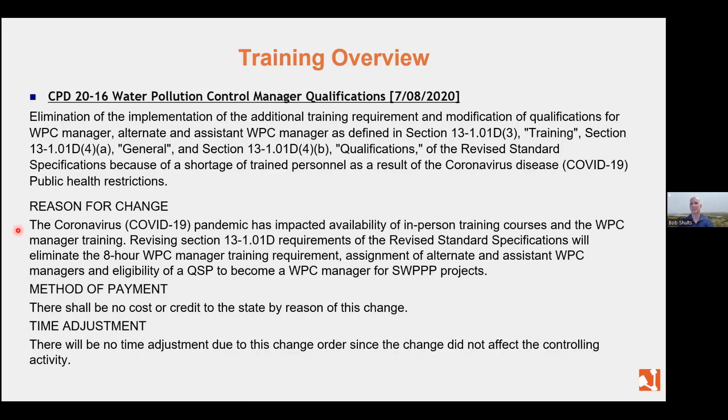Due to the difficulty getting widespread training to potential water pollution control managers, Caltrans issued guidance for contractors and REs for a zero-cost change order to remove the requirement for 8-hour training on a project-by-project basis. This came out during COVID. The directive stated that because of the coronavirus pandemic and availability of in-person training for the water pollution control manager, the revised Section 13 for the 8-hour training can be deferred on a project-by-project basis for a no-cost change order and time adjustment. That came out back in July 2020.

In most cases, at this point, Caltrans REs are not allowing this change order due to the current availability of training classes. You saw the statistics, you saw how many people are trained at this point. This is still out there as far as I know with Caltrans. So on a project-by-project basis, if the availability of training isn't there, you're on a remote project in a remote place, you haven't had a chance to be trained yet, you can still request that no-cost change order to revert back to the old spec.

But my understanding currently is that people are required to have 8-hour training at this point because the availability of training is out there now due to COVID improving. So most likely you're not going to be able to use the no-cost change order anymore, and you will have to have the water pollution control manager training. So if you don't have it and you need it, get signed up.

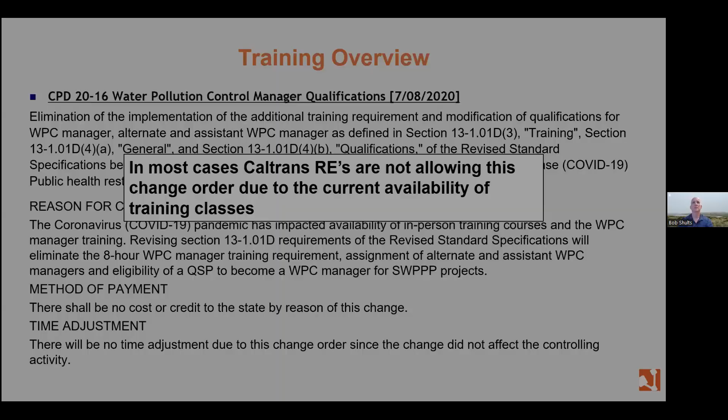Bob, this might be a good time to put this question in here.

Someone asked, are there previous requirements or certificates for this training, and shouldn't they get confused between this and what we used to have, the 24-hour training? Yes. So no -- I'm going to talk about all the things. As we move forward, the next few slides will talk about the pieces to the puzzle, the things you need to be a water pollution control manager above and beyond the 8-hour training, and the difference between an assistant water pollution control manager and an actual water pollution control manager. I'm going to go through those quickly.

So there are some other certificates that are required. Prior to the Construction General Permit in 2009, Caltrans used to have a 24-hour training required to be a water pollution control manager. When the CGP came out in 2009, Caltrans got rid of the 24-hour training and said, if you got to be a QSD, that's enough -- that's a 3-day training as it is, that's all you've got to have. And you have to be a QSD to be a water pollution control manager. They determined over the years since then that we're missing some of the understanding of the language of Caltrans.

That's the reason why they decided they wanted this 8-hour training, so that people really understand the language. I'm going to go through a narrative of what you need to be a water pollution control manager. In the overview of the training, you're going to learn about being a water pollution control manager and other CGP compliance strategies covered during the 8-hour training. A water pollution control manager must be an integral member of the project management team.

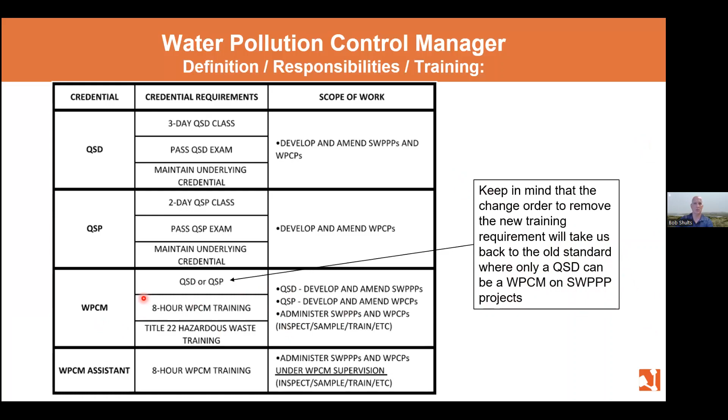Here's the language from it, which states you must assign a water pollution control manager. This is the direct language that people are being held to when they submit their SWPPPs and water pollution control programs. You must assign a water pollution control manager to implement the SWPPP or water pollution control program. You must assign an alternate water pollution control manager to perform all responsibilities of the water pollution control manager in his or her absence. The alternate must have the same qualifications. You may assign an assistant water pollution control manager to act under the supervision of the manager to inspect, repair, and maintain water pollution control practices, collect water quality samples, and record water quality data. You may have more than one assistant water pollution control manager.

So I'm going to talk about this language directly because we're being held to this. Obviously, when you submit your SWPPP or water pollution control program, you have to assign a water pollution control manager, period. You definitely have to have that person, no matter what. Got to have a person that meets the requirements as your water pollution control manager. It also says you have to assign an alternate water pollution control manager to perform the responsibilities when the water pollution control manager is gone.

So we are getting SWPPPs and water pollution control programs rejected or returned saying, hey, you've named a water pollution control manager, but you didn't name an alternate. You have to name both, or we're getting them kicked back. So you've got to name two people, a primary and an alternate water pollution control manager, and they both have to be eligible to be a water pollution control manager.

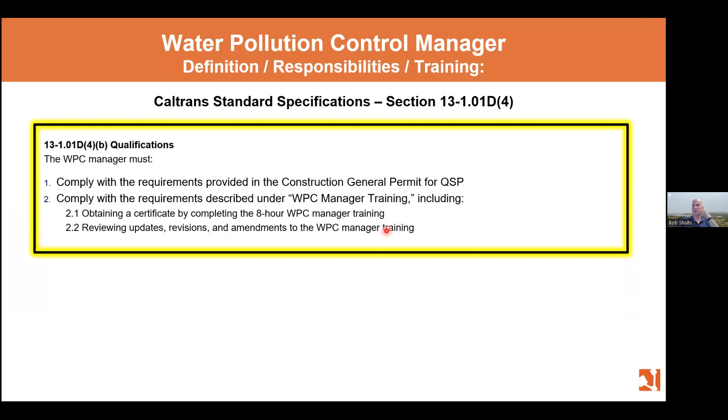This is just the language from the spec that states that you have to obtain a certificate of completion of an 8-hour water pollution control manager training. This is the actual language that I've talked about in great detail now regarding an assistant water pollution control manager. They have to be trained, and they have to have taken the 8-hour water pollution control manager training course in order to be an assistant water pollution control manager, in order to be able to be a designee who does inspections, repairs, maintains water pollution control practices, collects water quality samples, and reports water quality data. You have to have the 8-hour water pollution control manager training.

A water pollution control manager, so it's a Caltrans designation. Here's the definition: you have to be the primary contact responsible for water pollution control work. You have to oversee the water pollution control work. You have to maintain water pollution control practices, the maintenance of it, the inspections, the inspection reports, the REAPs, the sampling analysis, the preparation and submittal of NAL exceedance reports, violation reports.

The SWPPP annual certification is now gone. This is where at the end of this, we're going to get into the winterization plan amendment. The SWPPP annual certification was kind of a garbage-in, garbage-out thing where once a year in July you said, yes, I did everything right. So it was a one-pager and it was kind of unnecessary. So we got rid of it, but we replaced it with a mandatory winterization plan amendment that's due on September 15th, which I'm going to go into detail on.

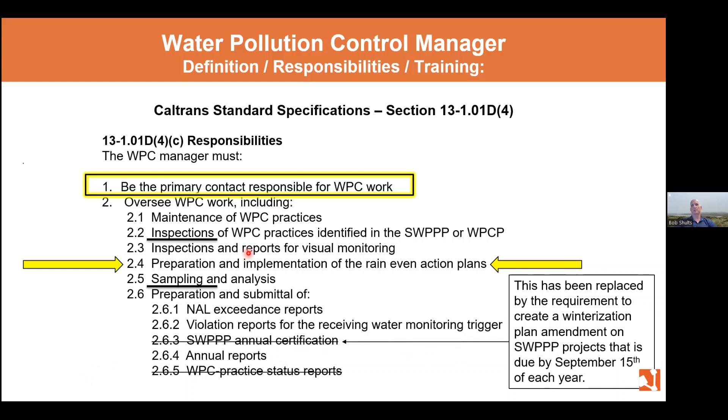Annual reports, water pollution control practice status report. You have to oversee and enforce hazardous waste management practices. You have to have the authority to mobilize crews to stop construction activities if they're causing water pollution control issues. Ensure that all employees have current training, implement the authorized SWPPP, revise the water pollution control program, be at the job site within 2 hours of being contacted.

And this is something that is definitely being adhered to, because people can't just farm out their water pollution control manager certificate without seeing the job. The intent is for the water pollution control manager to have intimate knowledge and be involved in the job site day-to-day operations from a stormwater standpoint.

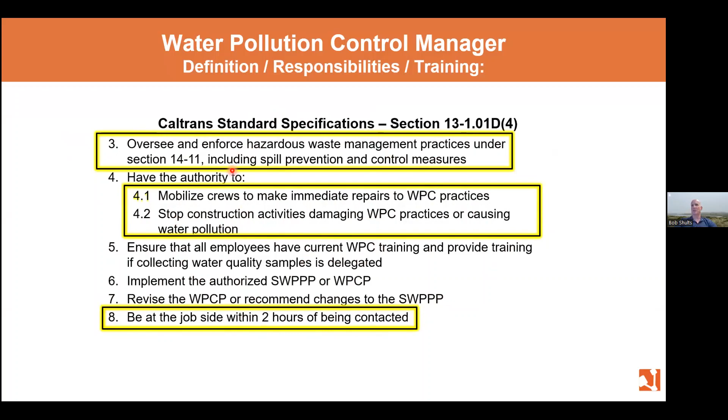Water quality monitors are also required, and we have 401 sampling on Caltrans projects. A water quality monitor has to be listed, and they're expected to have the same qualifications as the water pollution control manager, and they could be one and the same person. So my interpretation is, if they want to designate someone and delegate the work to do the sampling for water quality objectives like 401 sampling, they need to be an assistant water pollution control manager and have had the 8-hour training.

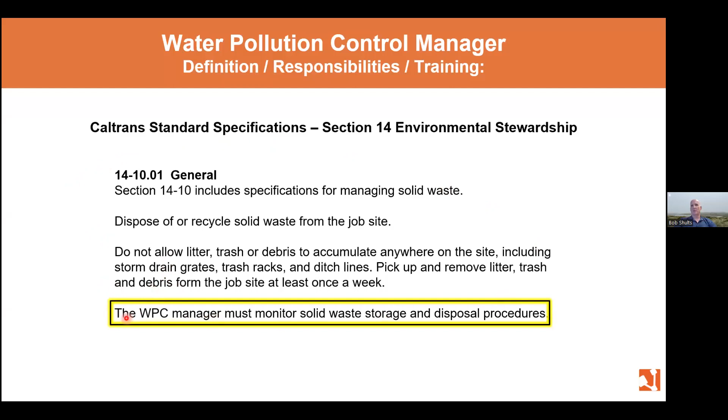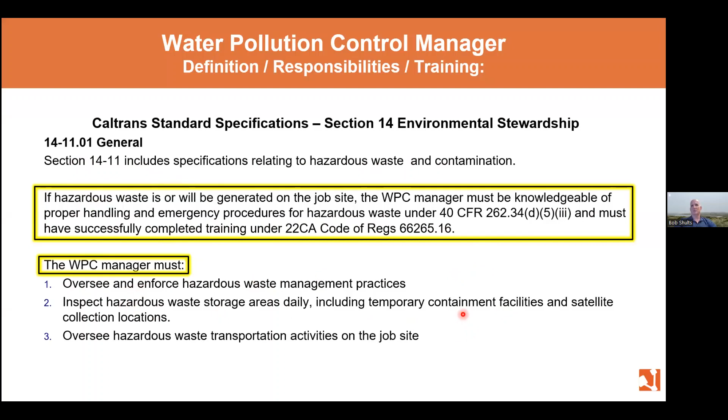Something to note that is necessary: the 8-hour training is necessary in other ways other than stormwater. You must be versed in section 14 environmental stewardship. You must have knowledge of solid waste storage and disposal procedures. You also must have hazardous waste understanding and be trained. This is where it states that you must have successfully completed training under Title 22 so that you can oversee and enforce hazardous waste management, inspect hazardous waste storage, and oversee hazardous waste transportation activities on the job site.

So that's where this Title 22 training comes in. On Caltrans projects, to be a water pollution control manager, you need the Title 22 training, because if there is, was, or will be generated, or ever any historical contamination on a Caltrans job, you can't be the water pollution control manager without having had Title 22 training. Send me an example of a Caltrans job that doesn't have some sort of hazardous waste, and good for you — it just basically doesn't come up. So you've got to have this training.

This is kind of the one that most everybody gets, hazmatschool.com. Last time I checked, it's $125, a 4-hour online course. You need to have this certificate, or you'll be rejected as a water pollution control manager, or some other certificate that proves you had Title 22 hazardous waste generator training. If you're HAZWOPER certified, 40-hour HAZWOPER, you're overqualified — the HAZWOPER certificate takes the place of this. You don't have to have this as well.

Okay, so that's a quick and dirty flying through what happens on the water pollution control manager 8-hour training. Again, a water pollution control manager needs to be able to do these things by definition: be the primary contact, maintain all the water pollution control practices, manage all the inspection reports, understand hazardous waste management practices, have the authority to mobilize crews, implement and authorize the SWPPP water pollution control program, and be at the job site within 2 hours of being contacted.

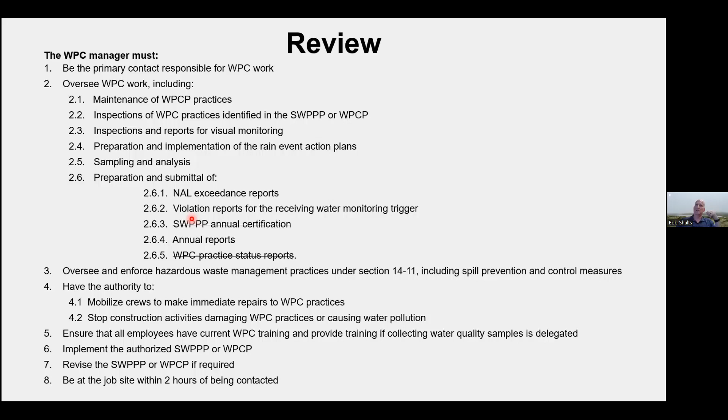So the 8-hour training, we're going to go over all this. You're going to do a training overview, and you're going to talk about the definition of responsibilities, a lot of what I've already just talked about.

We're going to go over the BMPs, inspections, the documentation. We're going to do case studies on filling out the CEM forms.

A tremendous amount of what they're trying to get out of this from an 8-hour water pollution control manager training is for people to understand the language of Caltrans, understand the paperwork, understand how to fill it out properly, when to fill it out, the timing of fill it out. It's all really important, and it's a big beef that Caltrans stormwater coordinators have had. People don't understand their language and how to fill out their paperwork properly, and they spend a tremendous amount of time kicking paperwork back. So we're going to go over that in great detail.

We're going to talk about the resources that Caltrans has for SWPPP and water pollution control programs and the preparation of them. We're going to talk about sampling and analysis plans, and we're going to have a sampling tutorial. We're going to do hands-on sampling training in my class. We're going to talk about reporting and miscellaneous.

We're going to go into detail on when to fill out a notice of discharge form. Notice of discharge forms are something that Caltrans stormwater coordinators feel like are underutilized and need to be utilized more consistently. So there's a whole section in my training on that, and then review and questions.

So that is what you're going to get when you come to my 8-hour water pollution control or any of the consultants' 8-hour water pollution control manager training course, so you understand that.

Okay. Now, the last part of this class, we are going to go over the Winterization Plan Amendment. As I mentioned, when the training requirement came out, the 8-hour water pollution control manager training specification change came out officially in April of 2020, announced in January of 2020.

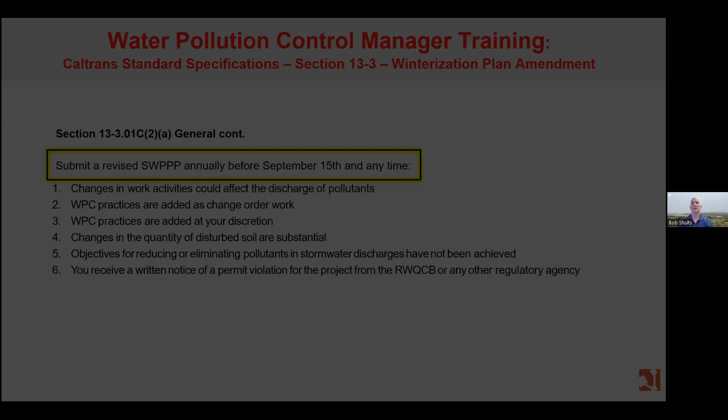Locations of sampling points change, you need to do an amendment. But you also need to do one by September 15th. Revise the SWPPP through amendment. The annual SWPPP amendment must include an annual winterization plan. The annual winterization plan must describe the preparation for the upcoming rainy season.

This should be part of standard operating procedure regardless, but now it's required, and here are the rules by which you have to do this.

By September 15th, you are required to submit a winterization plan amendment to Caltrans, and you must meet the six requirements listed here, or you may get comments depending on how you respond. These are: updated schedule, materials and labor, management of stormwater through the job site, management of areas within the job site, changes to monitoring locations, and slope stabilization.

I just saw something come up in the chat from Janet Rodriguez - good question. Is the winterization plan just for locations that get snow?

No, absolutely not. A winterization plan amendment by September 15th is due for any SWPPP job that is active after September 15th. Now, you may be able to work with your RE - if the job's supposed to be terminated by October 1st and you're really all buttoned up, you can talk to your RE.

But by contract, you're required to submit a winterization plan amendment for any job that's going to go beyond September 15th. It may be mostly blank, or you may have items 1 through 6 answered that the job's going to be done. But technically speaking, you're required to submit one. So whether it snows or not, you are supposed to do a winterization plan amendment by September 15th on any SWPPP job for Caltrans, period. You're required to do it.

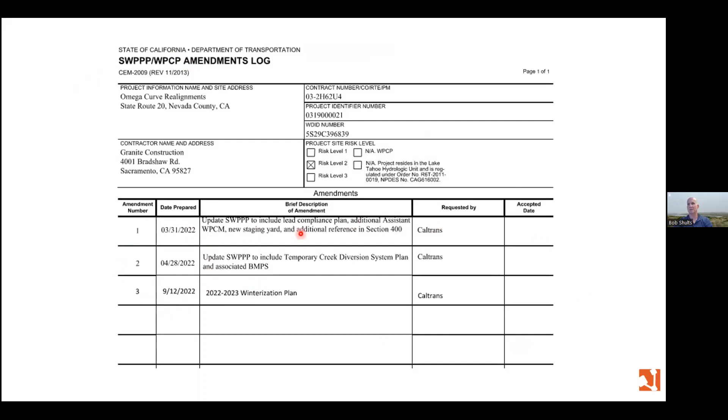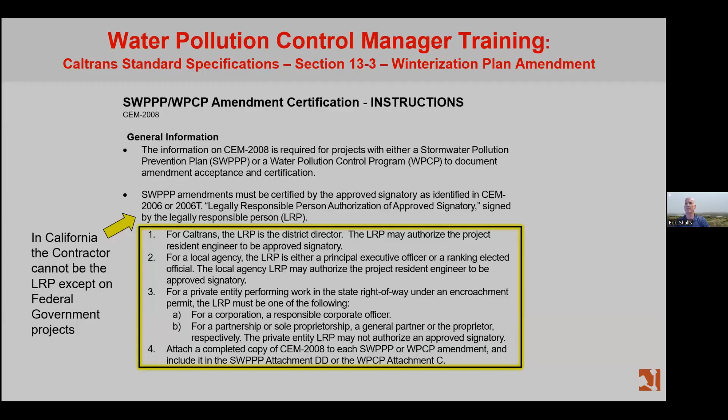So then you have the amendment log, which explains in sequential order. This is our 3rd amendment on this job. We have 1, 2, and 3, and the dates and everything else, and when it'll be accepted. Then we basically have created a template for our winterization plans that mimics the list from Caltrans. There are 6 items that are required, 1 through 6, and that is what we do on our cover sheet for a winterization plan amendment. We have 1 through 6, and we have an explanation and narrative.

And then there's a bunch of stuff that goes in the back end of this to add to it, but we're trying to make it simple for review. So this is our 2022-23 winterization plan. Updated schedule, see attached, and you'll see materials and labor related to water quality, water pollution control.

The subcontractor, so we list the subcontractor as a crew installing permanent and temporary erosion sediment control. Contractor will have a crew of 3 laborers to install BMPs as needed over the course of the winter. BMPs for temporary erosion include item 21, item 23, item 24, 25, and we list some quantities in there. So it does talk about labor, but not total labor, but it does explain.

And essentially the idea behind this, you saw from Deanna's comment, is we're trying to put materials and labor together so that it's clear to the reviewer that it's going to take 3 weeks to get this winterization plan implemented.

So we need to make sure that's starting now, or it's a small job and it's only going to take 2 days to get it implemented. So we've got time, we can look at a 10-day window and decide when we're going to start. That's the narrative process here that they're looking for in their comments, if you get comments on that item.

Number 3, management of stormwater through the job site. If your plan to adjust flow or drainage during the winter months from what is shown on the plans for run-on, runoff, conveyance — no plan to adjust run-on, runoff, and downslope conveyance at this time. So that was our response.

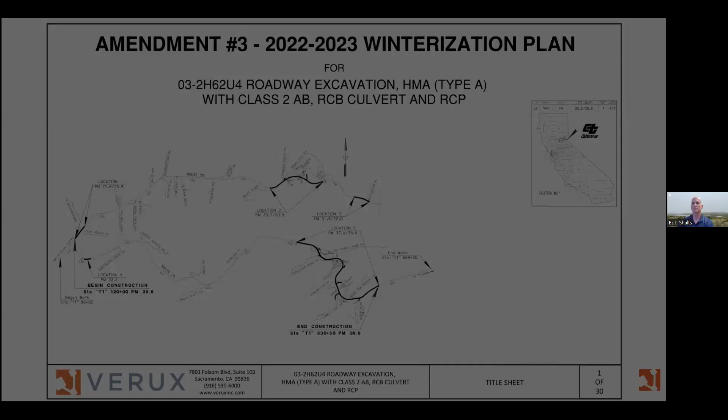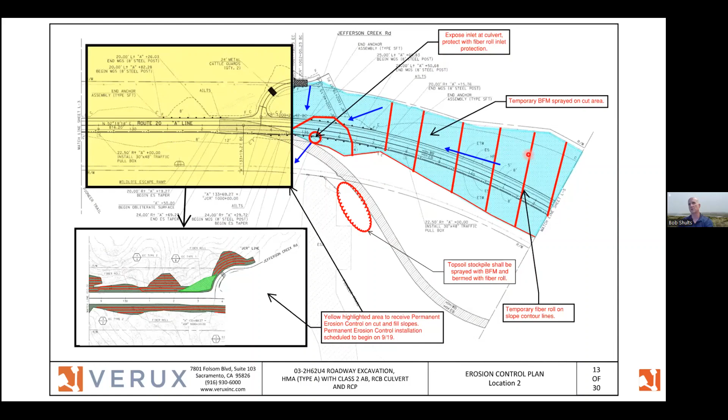The key thing is that you have a set of rules here. It's got to be turned in before September 15th. That gives you time to iterate. Typically it's not going to rain on September 15th, although this year it's a little different. You've got your 6 items, so you need to respond to these 6 items, or you're definitely going to get comments back from the stormwater coordinators and REs.

And then you go through it. Again, this is meant to be a collaborative exercise with the contractor, with the RE, with the project team, to come up with a plan.

And the purpose is that we don't go to jail, right? We don't end up with fines. We don't have problems on the job site because we've given ourselves an opportunity to close the job for winter or stabilize and protect the job for winter, and then focus on the areas where we have to work in the winter and focus on how we're going to protect those areas in a short duration time when a rain event's coming, and how we're going to open them back up after rains, between rain events over the winter.

So there you go, that is the Winterization Plan and Water Pollution Control Manager Training Seminar.

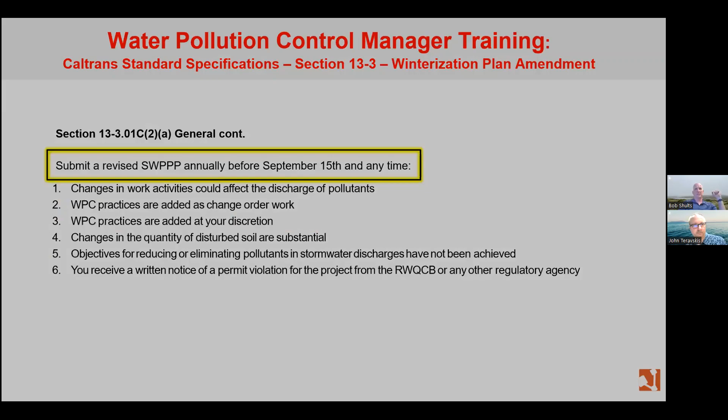The requirement is to meet that language, which says you have to assign a water pollution control manager to implement the water pollution control program, or SWPPP, and assign an alternate. That means you have a minimum of 1.

But if you could list 10, I don't see a negative for listing as many as you've got. If you've got 4 people at your company that meet the requirement to be a water pollution control manager, list 1 as the primary and the other 3 as alternates.

I've received a comment once saying, I've got a whole bunch of people listed as assistant water pollution control managers—I've listed 10 people before—and I got a comment asking why all these people are listed. Because I can. There's nothing saying you can't list a whole bunch of people on there. It just makes it so their info is there.

I understand it can be unnecessary, so we've kind of gotten away from listing everyone who can be an assistant water pollution control manager, just so it doesn't eat up as much paper. But there is no limit to that.

The beauty of it is, if you have 4 at your company, 1 listed as primary and the other 3 listed as alternates, you probably aren't going to know ahead of time which of those other 3 is going to cover for you, John, if you're the primary. It depends on the day and who's on vacation and all that stuff.

By the letter of the law, if it's only John and one other person listed as alternate, and that alternate can't do it that week, then technically you have to do an amendment to get another person listed as an alternate. So if you're already listed, you just fire an email off to the RE saying, hey, I'm on vacation and Mary is going to cover for me, and she's listed in the SWPPP, so you're good.

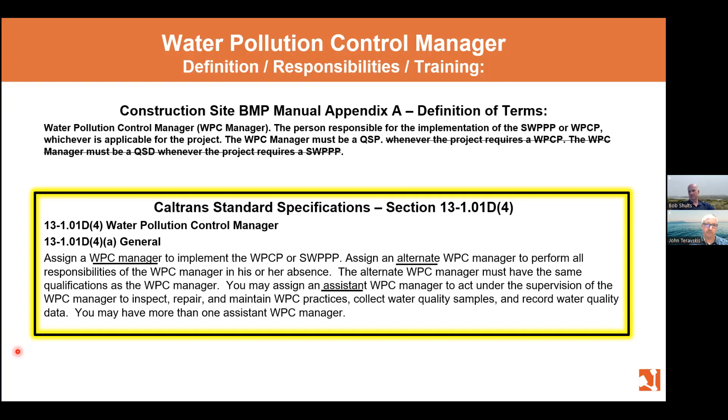Right, let's talk a little bit about level of detail. You and I were having some dialogue before we came on to this workshop. This is the 3rd year these winterization plans have been out, and we've both been noticing—firing off emails to Deanna or Dave Corpus or Michael Sweeney to get clarification on the list shown here. I developed a template just like you did, almost identical. It's funny how close they were, because I just copied this and matter-of-factly answered all these questions. Yes, and I was shocked to have almost every winterization plan returned.

Right, detail—there's a lot of detail. Like the clip of an email from Deanna showing exactly where this came from. Is this just someone's interpretation? Yes, and that's where we're at.

That's what I want people understanding—that's where we're at, this is all we have. And this is an interpretation of what that says, because it says materials and labor. So initially, personally at Verux, we were vague when it came to this, because it doesn't say materials and labor and add all this detail—it just says materials and labor, so that can be interpreted many ways. Early on, we were very general, saying we're going to have for maintenance of BMPs a crew of 2 laborers. But this is an interpretation from one of the stormwater coordinator teams, a great team from District 3, who I think made a reasonable interpretation. I don't disagree with it, I think it's reasonable, and it's helpful. But a different stormwater coordinator team could interpret this differently.

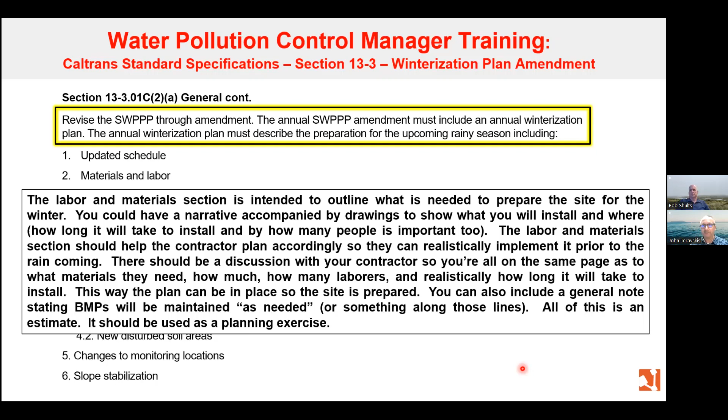I'm looking at the list of participants. We have people who wrote winterization plans in 2022. Anybody want to unmute and share? We've got just a couple minutes left before we end this workshop. Anybody want to tell us lessons learned from 2022? I know you're out there, I see you in the list. I'm not going to call out any names, but if you'd like to talk to us about your experiences this year, that'd be great.

Unless someone unmutes real quick, here's a question that came in: do we need hazmat training now or just before the new CGP requirements? The hazmat training piece is part of the Caltrans requirement to be a water pollution control manager—it's a Title 22 training. As of now, to be a water pollution control manager on Caltrans projects, you need Title 22 training on pretty much all Caltrans projects, because nearly all of them have some sort of hazardous material. If you submit a credential showing your QSP and 8-hour water pollution control manager training without the HAZWOPER or Title 22 training included in your certificates, you'll get rejected by the stormwater coordinator, unless you find that unicorn Caltrans job with no hazardous waste on it. But it's super easy—it's $125, it says 4 hours, but it took me about 2 hours or less.

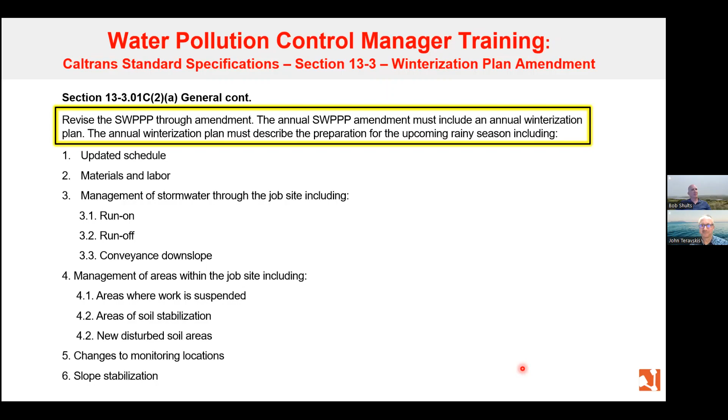Would Caltrans consider developing a template for the winterization requirements? It looks like Bob and I already developed our templates—they're almost identical. We talked about this and actually created a draft template. But be careful what you wish for—it ended up adding a bunch of stuff you don't need, which made it harder. Sometimes it's a lot easier to create your own template. There's no magic to it. The main thing, whether Caltrans creates a template or you create your own, is what you add to the back side—that's what really makes your winterization plan. This is the narrative piece that answers the 6 questions, but without the schedule, it's worth nothing, or not worth very much. When we looked at having a template for Caltrans, it just made this part harder. I think what would be more beneficial, which John already brought up, is having a narrative description and a meeting of the minds among stormwater coordinators about their expectations and the answers to questions 1 through 6. That would be helpful—like an instructions piece—and we'd get a lot out of it.

But we're out of time.

One last question: how much do you charge for your training? $450. But call me if you've got a group.